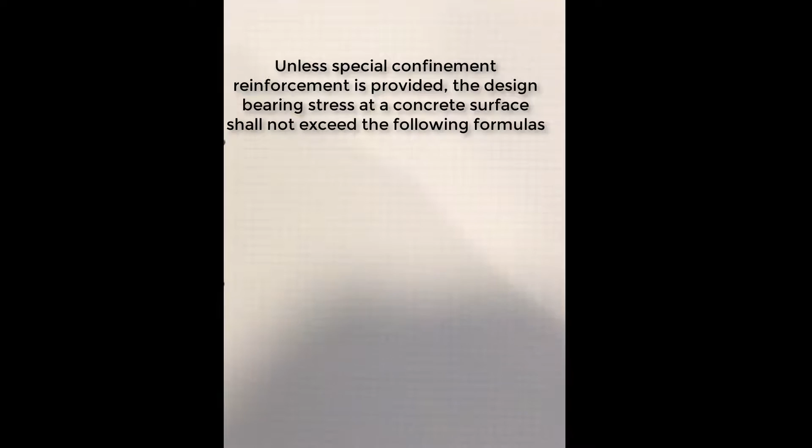Here we have section 12.6, bearing surfaces. Now the first point is very important. It says, unless special confinement reinforcement is provided, the design bearing stress at a concrete surface shall not exceed two formulas for bearing capacity.

So what they're saying here is if you don't have ligs here, spaced to that in the special confinement design zone, as in section 10 of the code, then you must design to this criteria. However, for a lot of people, to be safe and more conservative, this is a necessary check in addition.

So first of all, you have the equation either phi 0.9 f'c times square root of A2 on A1. That's 1. 2 is phi 1.8 f'c. So what we're going to get into now is what governs both equations. So obviously the strength of concrete, and here the function between A2 and A1. So A2 is the largest area of the supporting surface that is geometrically similar and concentric with A1.

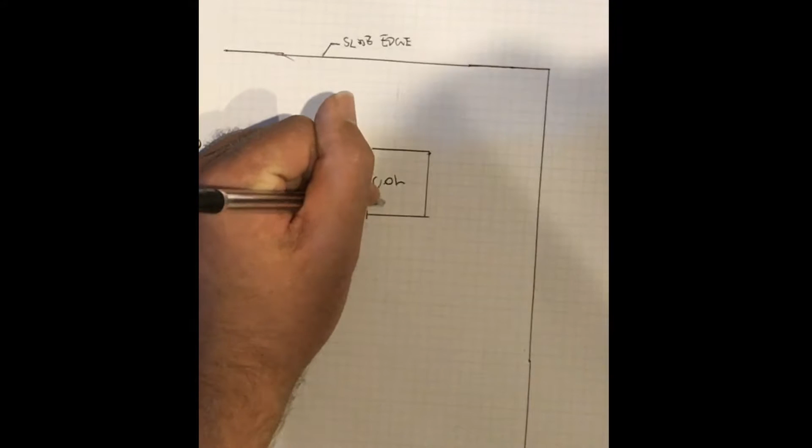So what they actually mean here is, let's look for a ruler. What they actually mean here is largest area geometrically similar. So you have to make a shape similar to this in the length to breadth ratio. So this here, which is the column, that is actually A1 because that's the bearing area. Here we have a slab edge. So this is more critical when we are close to a slab edge.

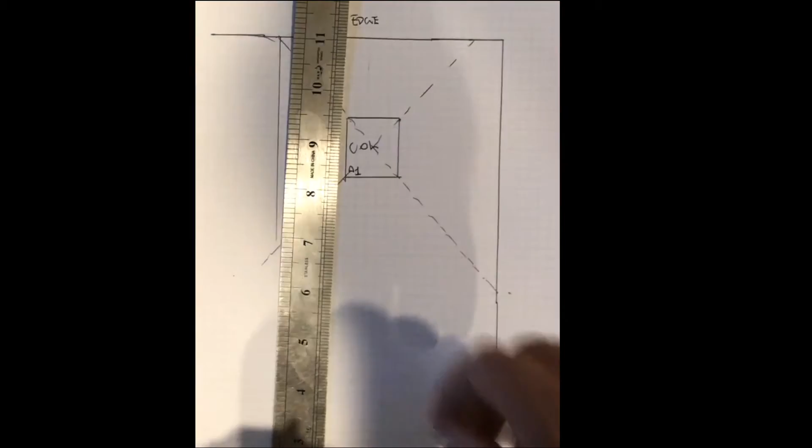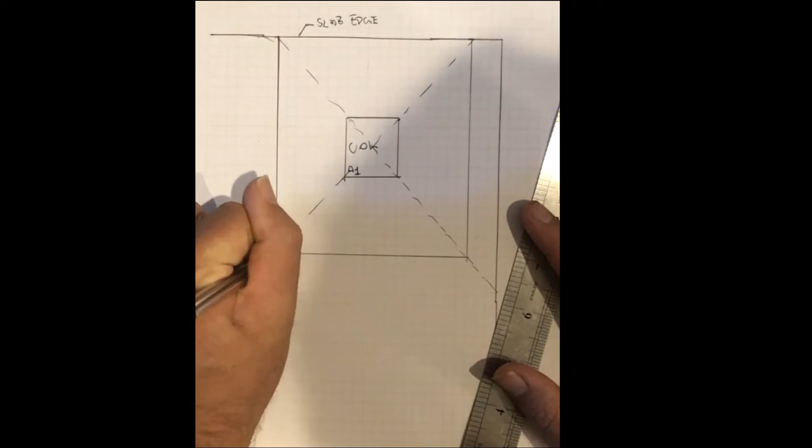So now calculating the A2 dimension, this will make it geometrically similar. And in the other direction, we have it like this. So what our A2 will begin to look like is something like this. So taking the dimension at both angles like that, and then calculating an equivalent area, that will give you a shape geometrically similar. As you can see here, if we move the column closer and closer to the edge, the A2 will be much shorter.

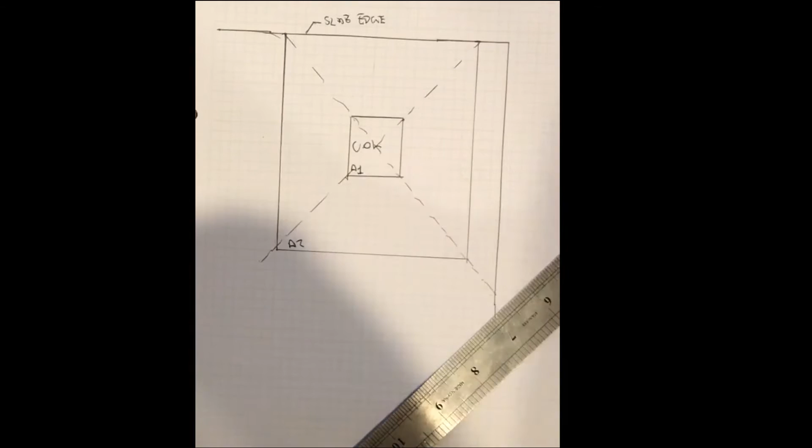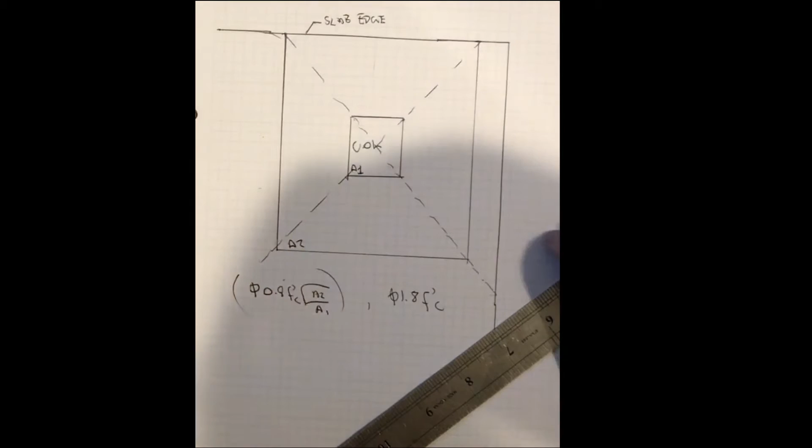So what this is saying is the first equation, which is phi 0.9 f'c root A2 on A1, as this moves this way, A2 gets much smaller, and this one is more critical than the phi 1.8 f'c. So let's assign some values now and do a computation. So here we have a 300 by 250 column as the A1, and then the A2, which goes out to the slab edges, we've got a 1380 by 1150, which is geometrically similar.

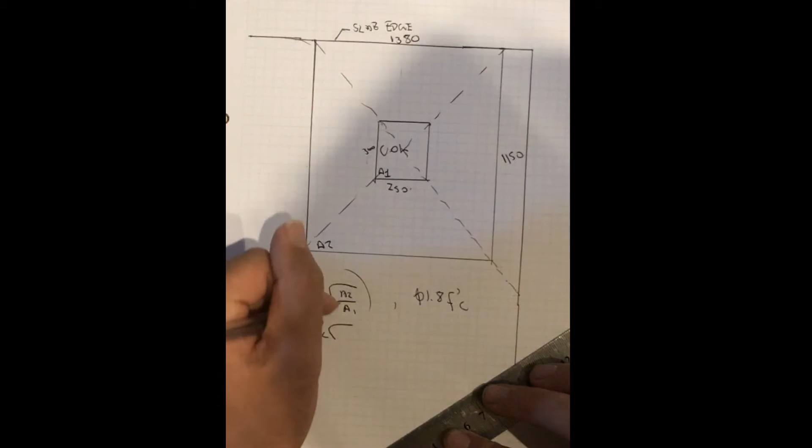So phi always for compression is 0.6, so 0.6 times 0.9 f'c times square root of 1380 times 1150 divided by 300 times 250, or 0.6 times 1.8 times f'c. We'll keep it as f'c. So what we get here is 1380 times 1150 divided by 300 times 250. That's the A2 on A1, which is significantly large.

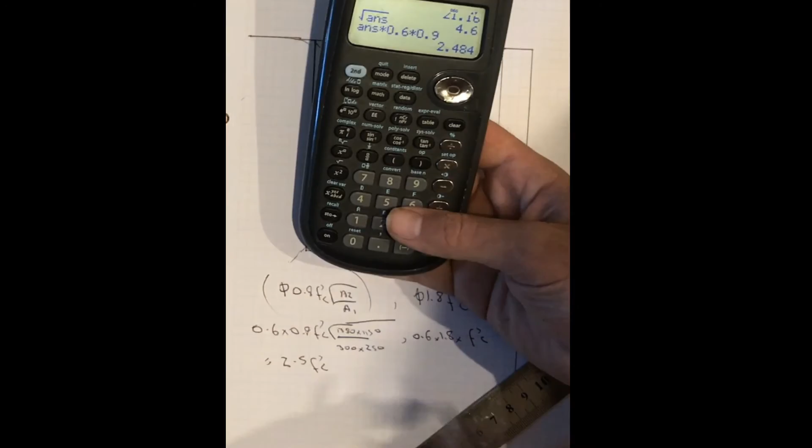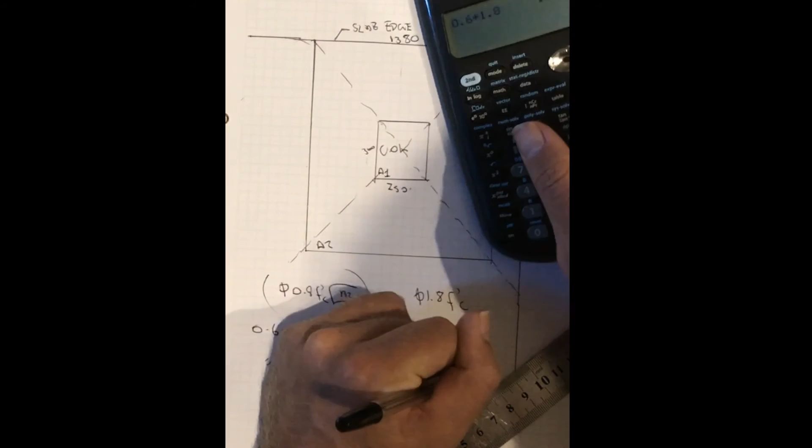Square root of answer times 0.6 times 0.9. We end up with 2.5 f'c. And then on the other side we have 0.6 times 1.8 equals 1.08 f'c. So here we have it. As A2 gets smaller and gets to the edge, if it's on the very edge of the surface, A2 on A1 equals 1, and then all of a sudden this value is significant and works out to be very critical.